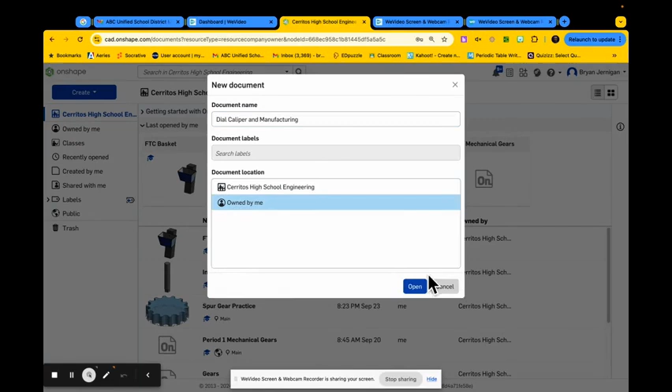So I'm going to create a part. You sketch, it's going to be the front view. All right, we're going to create a sketch on the front plane. We'll just make this 4x4.

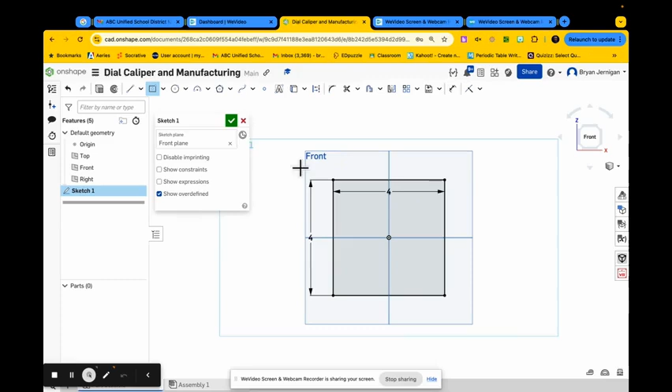And we're going to extrude this. We're going to go ahead and extrude this. Let's just do 2 inches. All right.

I'm going to go ahead and create a sketch on this front plane, new sketch. And then I'm going to create a point on that sketch. I'm not going to make it directly in the center, I'm going to put it just above the center. Actually over in between, so put a hole here.

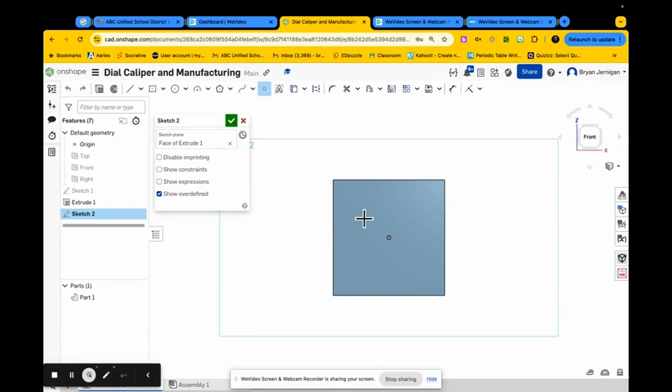Point there, and let's go dimension it. 1 inch. And 1 inch. Alright, so once I have a dimension, notice it's all black. That means it's constrained.

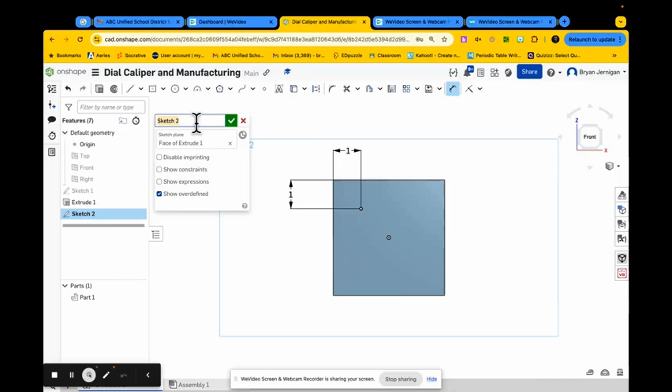Alright, now I'm going to go ahead and create the hole, using my hole tool, which is here. Don't worry about all this yet. I'm going to click on the point, and it starts creating the hole. I need to first define the diameter of the hole. I'm going to fill my hole diameter 0.5 inches.

And then you have some options here. So termination is blind, meaning you have to set the depth, or you can have the termination through all or up to next. We're going to go with blind and through all for right now, so in this case, through all. It goes all the way through the part.

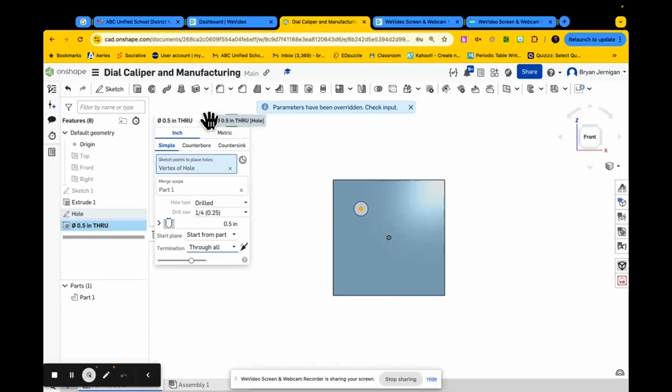And then we'll go ahead and click the check mark, and it already names the hole through. Okay, so let's go ahead and rename this Thru Hole.

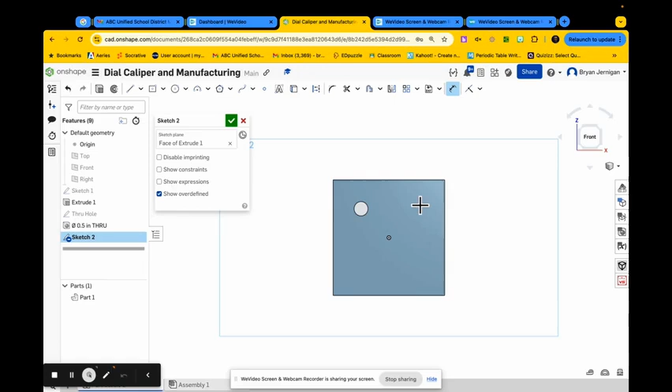Okay, next thing I'm going to do is create a sketch on the surface, and we'll do another point. Let's do this point over here. Let's go ahead and dimension this point. Call this 1 inch again.

Again. Call this blind hole.

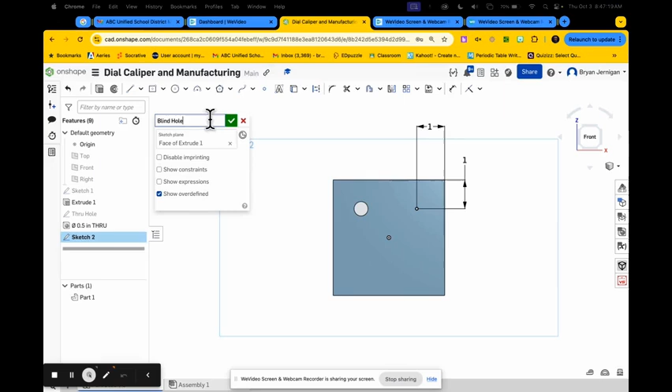We're going to use our hole tool, click on the hole tool. In this case, I'm going to go ahead and change this to 0.75 now, and instead of through all, I'm going to leave it blind, and change the depth to 0.5. So now we have a depth, according to this depth.

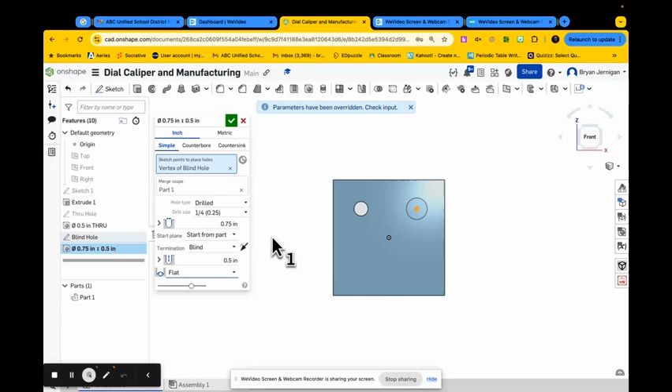And then I don't want to have an angle cut at the bottom, I want it to be flat, so I'm going to go ahead and put flat, so it will be flat. Okay, so then I'm going to go ahead and click the check mark. And now I have a hole that's not all the way through, and it's flat.

Next thing we're going to do is some subtractive manufacturing. So we're going to create a sketch on that surface, and we'll call this Subtractive. Okay, we'll call that Subtract. So we're going to go ahead and work on this sketch on this corner.

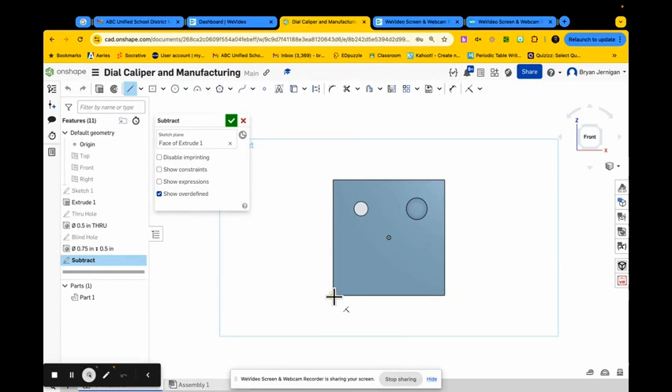So I'm going to create a triangle cutout, by starting here and drawing a line up, and then another line down, another line over. Now you'll notice that these two lines are black, that's because they've been constrained.

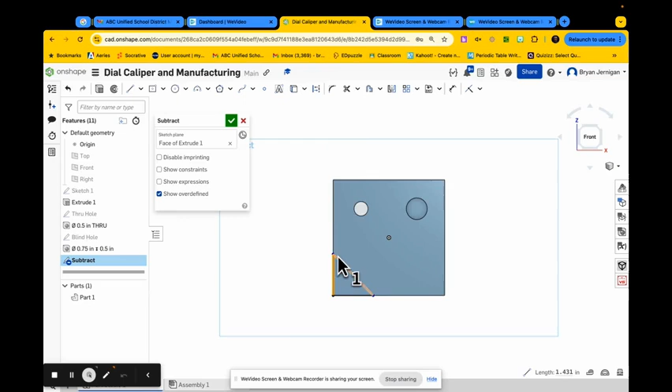So what I can do is go ahead and try to dimension, and you'll see what's going to happen here. I want this to be 1. I want this to be 1. And when I add this dimension in, now this one turns black, which means it's fully constrained.

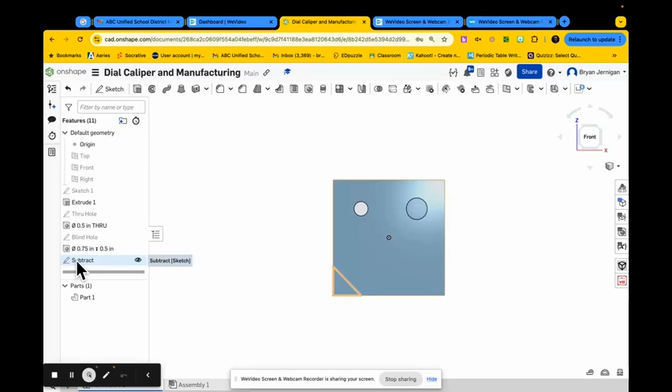Once I have this part made, so once I have the sketch drawn, I'm going to go ahead and extrude. I'm going to do remove extrude. So up here, I'm going to go remove extrude, and then I can change the depth. I'll put the depth as 0.75, and then I'm going to remove extrude.

Finally, I'm going to repeat that process, but I'm going to do an additive. So we'll call this remove, or subtract. I'm going to kind of repeat that process.

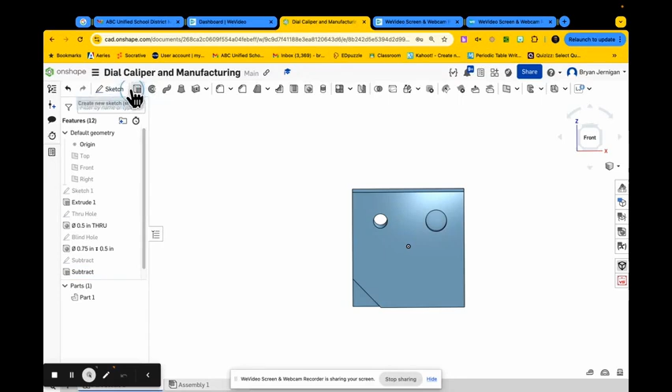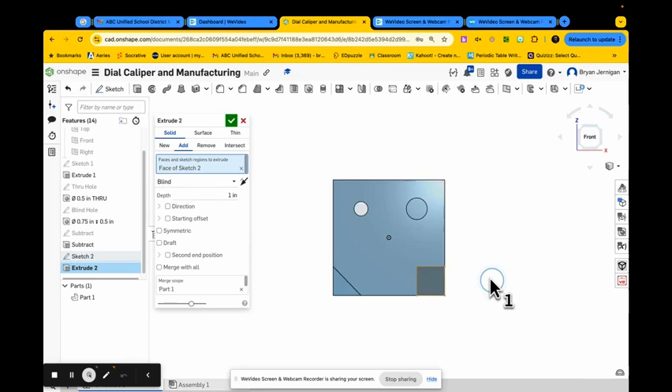Do a sketch on the surface, and you can do all these sketches on the same if you wanted. I'm going to do a corner rectangle this time. I'll go ahead and make this one 1. And then I'm going to go ahead and extrude that, and now I'm doing an additive.

Call this add. And we'll call this add 2. Okay.

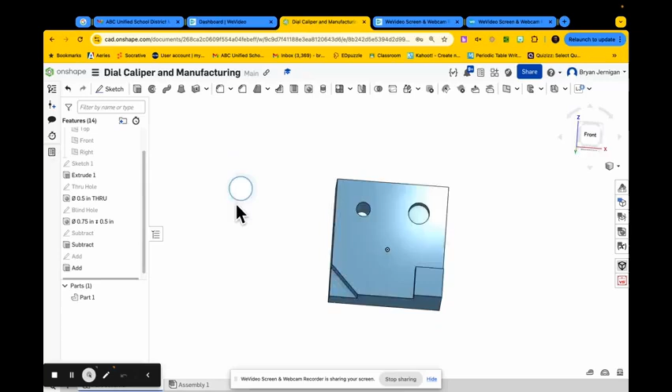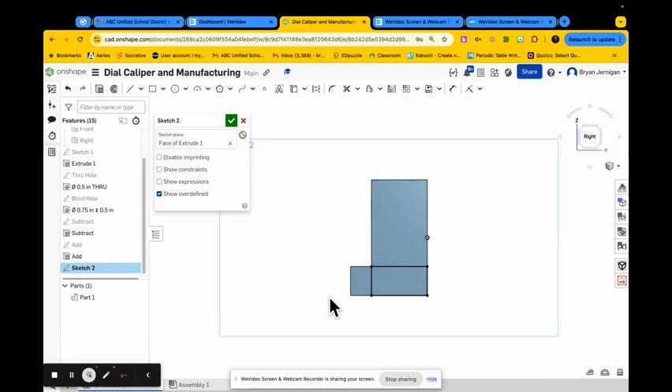All right, so there are all the different types of holes and add-ons we can add, and you can do this on any flat surface or create flat surfaces of your own. So I could create a sketch on the surface here and do the corner rectangle, start from corner to corner. In this case, it's fully constrained already, so I just hit escape, and then I can extrude that.

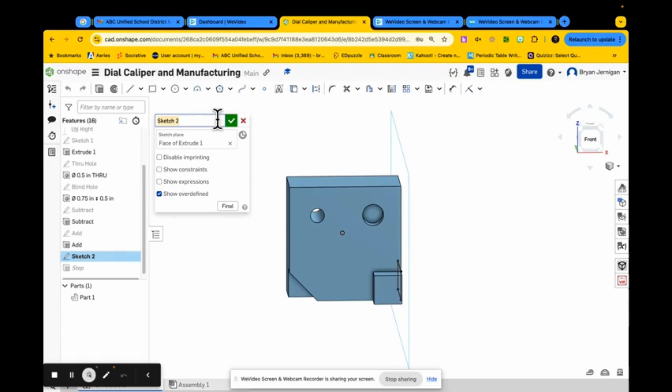If I wanted to make a bit of a step, I can extrude that sketch out. We'll call this step. I'm just going to edit this, I'll rename it, call it step. Okay, there you have it.